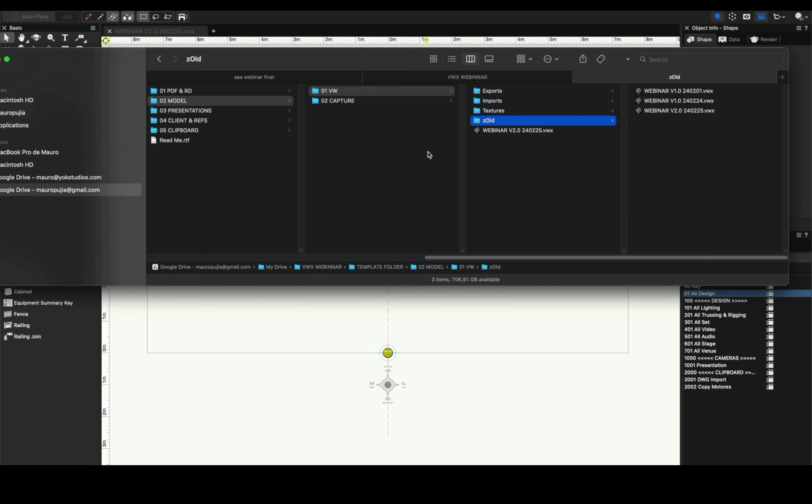I want to start showing you really quick how I organize this on my project folder. I also have a dummy version that I duplicate every time I start a project. It has different folders that I'm not going to be focusing on, but I'm going to show you super quick how I use the folder model. So I divide it into my previs and my model software, in this case Vectorworks, and I put this title, which is webinar version 2.0 and the date of today. This allows you to have a really good tracking of all the versions, and I like to make a folder dedicated to saving all the previous versions. So as you might see here, I have the version 1.0 and I also have the version 1.0 but with another date.

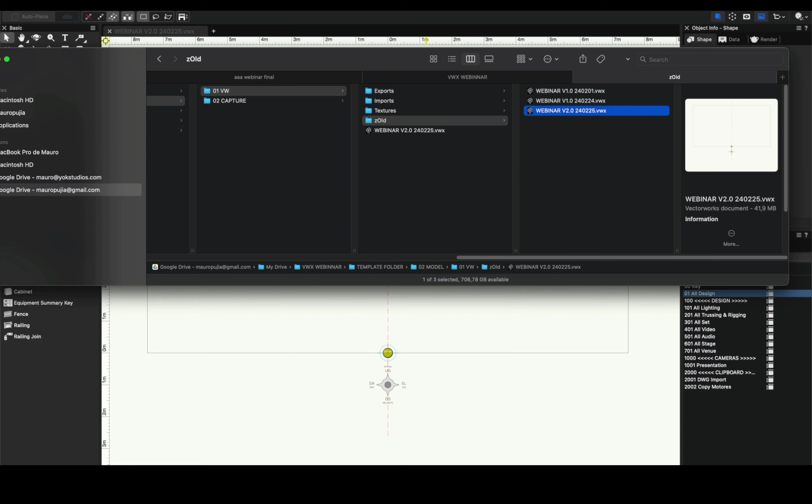So this allows me this workflow of dates, having the date expressed by year, month, and day, which allows you to have a good list of all the files in order, ready to use and check.

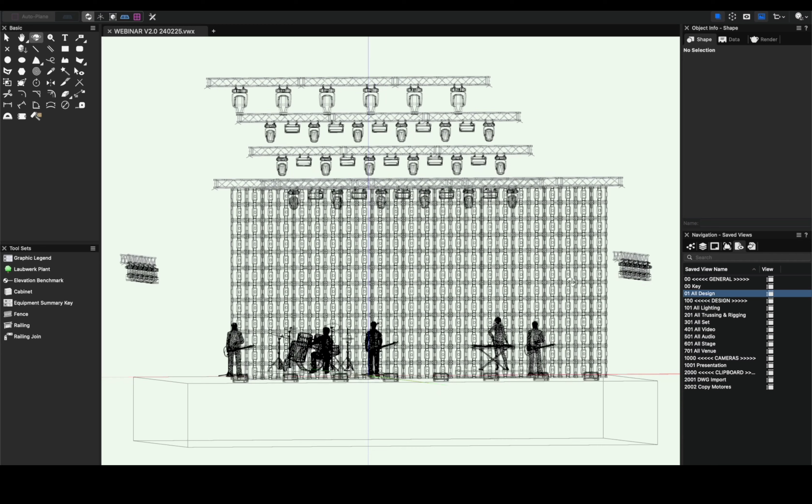So let's get back to the actual template. This is the first look that you see every time you open a template file. As I mentioned before, I have already my views, and I'm gonna jump into an all design view, so I'm gonna be seeing this stage that I already designed. I'm gonna make a shaded view of it and orbit around a little bit.

It's trying to draw all the geometry. Let's wait some seconds, and then you are... great.

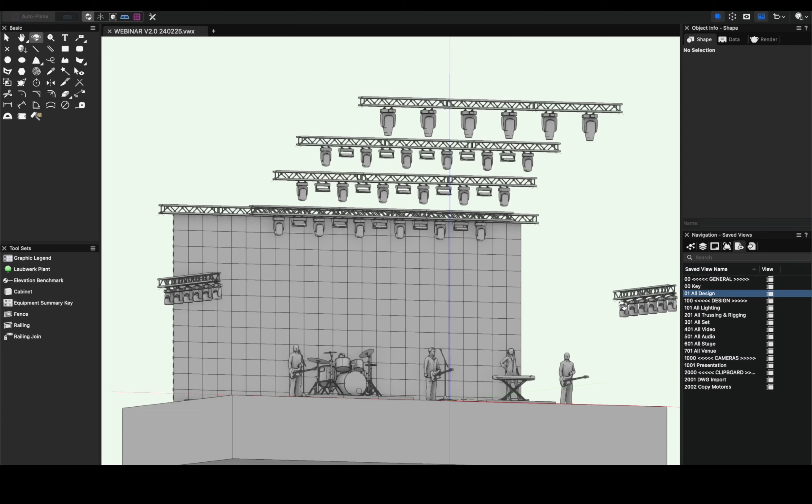So it's really simple. It has one front truss, LX1, LX2, LX3, and two side slides, and at the end, LED screen with some lighting on the floor.

Let's jump back to top plan view. So here I have all of my lighting rig, and as you can see, I already put all of them into my lighting classes. Let's collapse all of this.

So here I have the lighting position front, and the type of fixture is a spot. I always like to mention the type of fixture instead of the model and the brand, because I feel if you replace this fixture by another fixture, it's super easy to find it by type of fixture.

I also have, if I click my magic tool, which I love, the select similar tool, and press the setting class, you can see how these beams belong to LX1, same way the strobes, same way with these beams on the LX2, and so on.

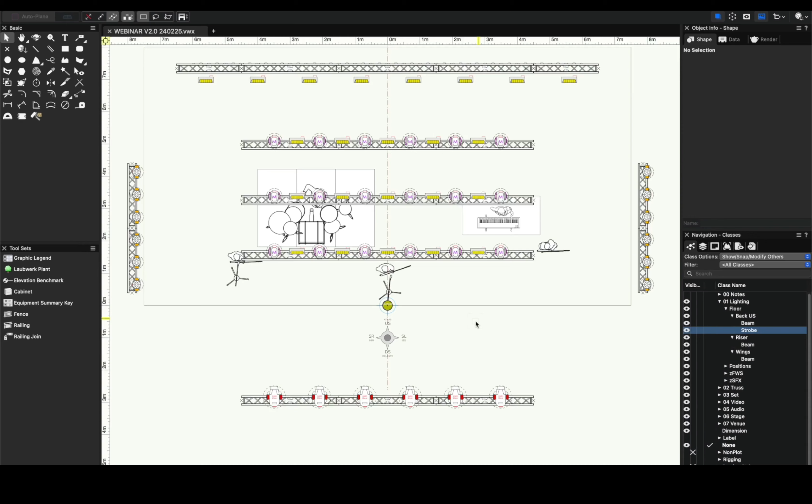So let's say I want to add some beams in the floor. I can access my resource manager, and let's stop a little bit here in the resource manager.

I want to show you how I organize this. It's basically copying the same philosophy of including numbers and departments. I try to condense in the number 3 the set, the stage, and the video.

So here, for example, I have the musicians, which also live in the stage design layer, and the video where I have my LED screen module.

Same way with fixtures, where I have all of my custom fixtures that I made, and I save them in a specific file called fixtures, my name and the year. I do the same thing with trussing.

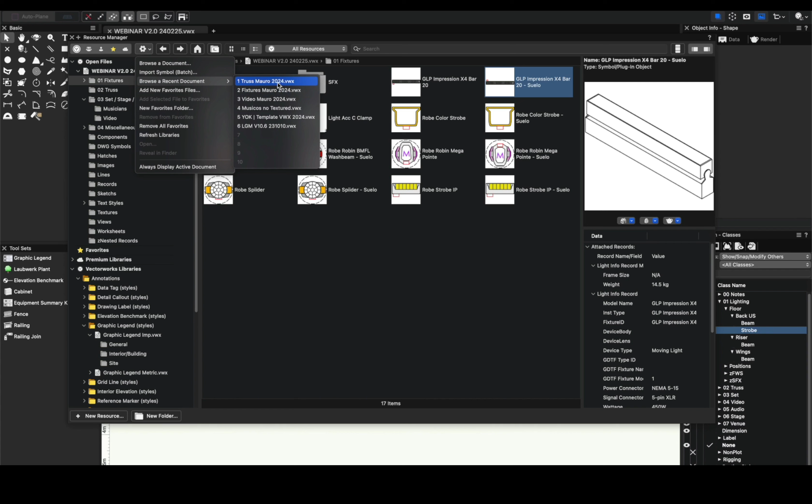And then I like to create different folders for the rest of the components that Vectorworks have. We're gonna see in part number 3 the use of worksheets, and something that is really useful, the graphic legends.

So let's get back to our design. We were dealing with the idea of adding some more lighting to our floor pack. So let's begin doing that.

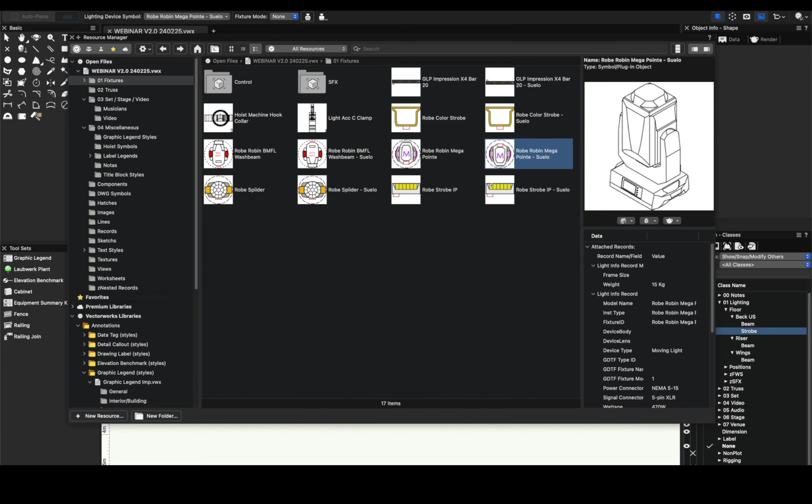I'm gonna select this Robin Mega Pointe. Click once, click here at the center, and then I will use another one here.

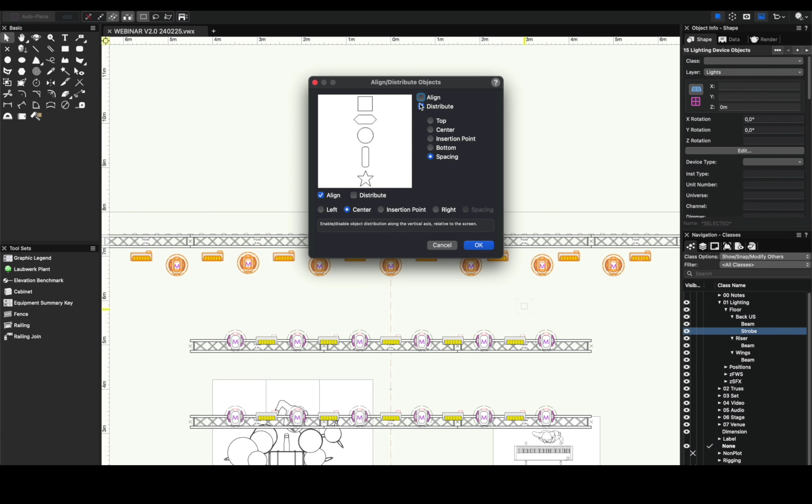This really good tool, I will press with the shortcut, is the align distribute objects. I'm gonna distribute it so I have it well organized.

And I need to put all of these guys into their class. So in this case, it's floor, lighting, floor, back, upstage, beam.

Let's say you also would like to add some spots to your floor pack. Let's turn that this. Another one and another one. Let's align this first.

Excellent, and then let's mirror this so we can have it on both sides. Since I don't have it in my actual floor class, I don't have anything to put these lightings as a category.

So instead of creating from zero, I will duplicate this and edit it. This will allow me that every time I call a saved view that already exists, which holds all the floor pack of this design, we are gonna see these new spots that I already added.

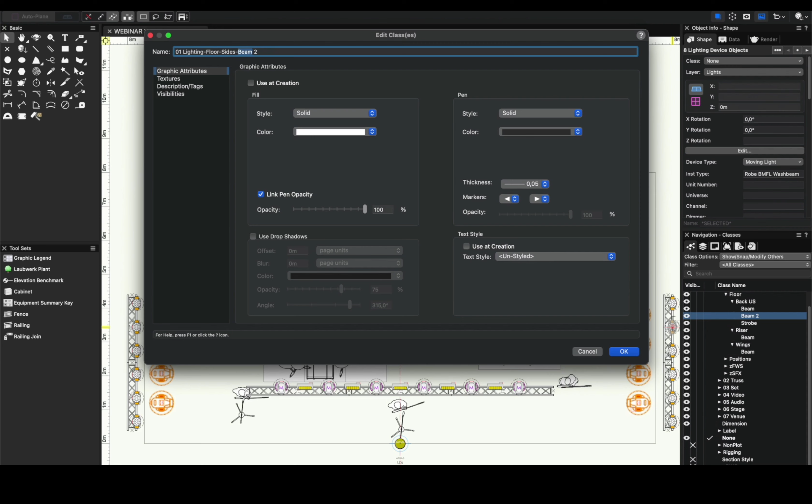So let's put floor, sides, spots. And with the spots selected, I'll click assign to selection.

So if I go to my organization window, to my saved views, I have all the main views for my different departments, and I delete the ones I always use to create some of them, so you can see the exercise from zero. So I'm gonna duplicate all lighting, edit it, change the number, and put lighting floor.

So I'll have all the classes that only belong to Floor. So let's hide every position.

I don't want to see the follow spots or the special effects, and I also will edit the layers because I don't want to see the trusses.

And maybe the stage, I want to see it full. And maybe we can do one for...

Let's do one for trussing, so we can arrange and have different views for trussing, video, and edit trussing lights. So again, same exercise. Oh, that's not correct.

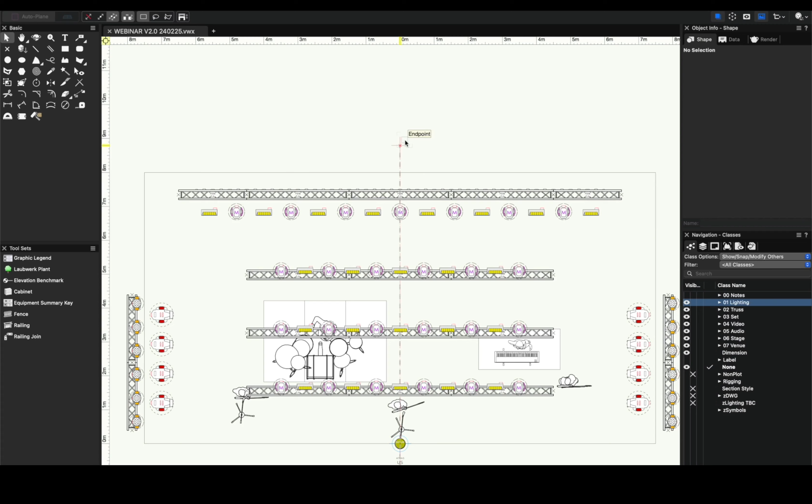So now, if I move here and go to my views, I can click on the trussing that belongs to video and only see the truss of the video. The same exercise for the lighting floors, and so on.

So now let's get back to our design, and we're gonna see how to use duplication on the sheets. So on the sheet layers, I always have a clipboard too that holds many different tools that I use. All of them you can find on the resource manager.

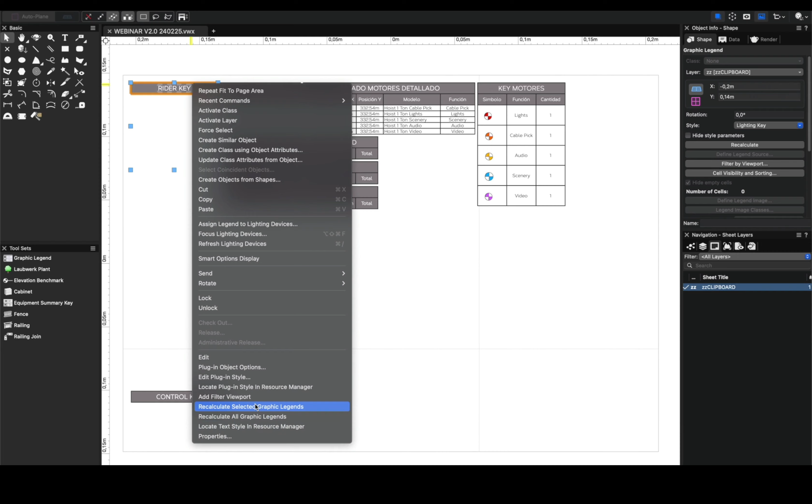This lighting key, I did it from a symbol-based legend, and I edit this through this menu. I click here on defining the legend source and find objects that meet the following criteria: type must be lighting device. I press OK, I press OK, and I press OK. And now I am sure that this lighting key will show me only the information regarding lighting. This is a really useful tool that came up a few versions ago.

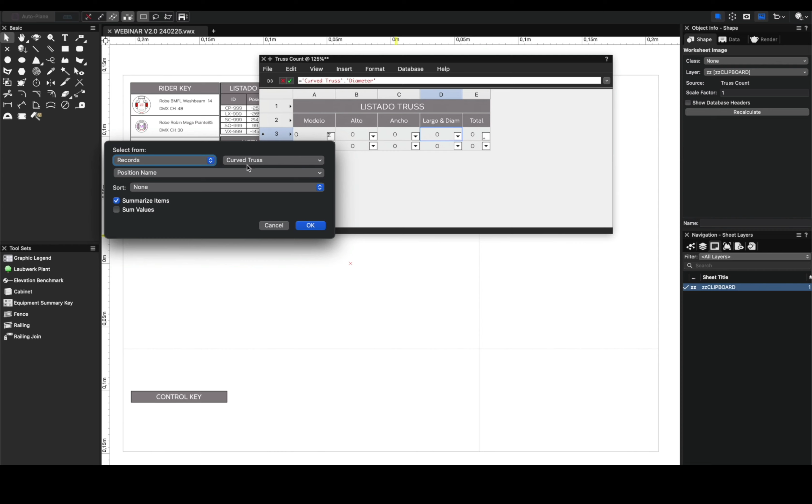And I have the same thing with, let's say, trusses and worksheets. For example, if you locate this worksheet, you can have a truss count. So you have to edit it from the sheet. I have one that belongs to curved truss and one that belongs to truss record, because sometimes I use the tool of creating curved truss and don't assign a record. That's why. And here you can play with the edit criteria to have a better understanding of how worksheets work.

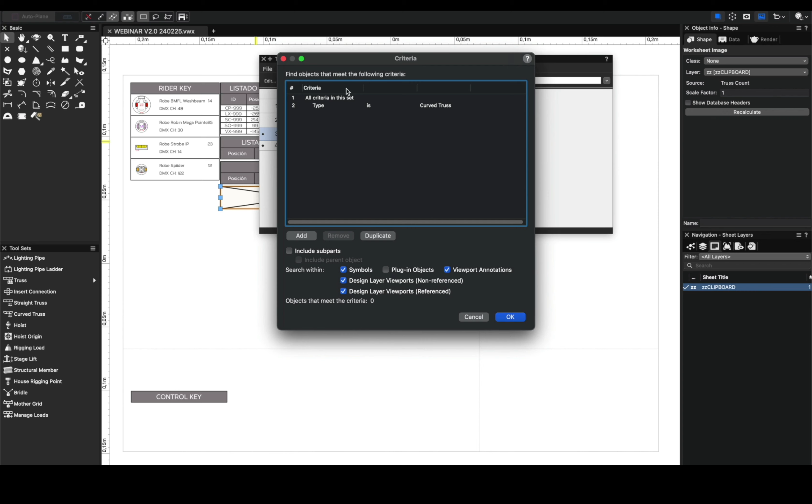Let's wait for that. Actually, I think it didn't come. Yeah, that's it. So in this case, find objects that meet the following criteria: type is curved truss. And here we have the same exercise, find objects that meet the following criteria: type is truss. And we actually have some of them, so it's already updated.

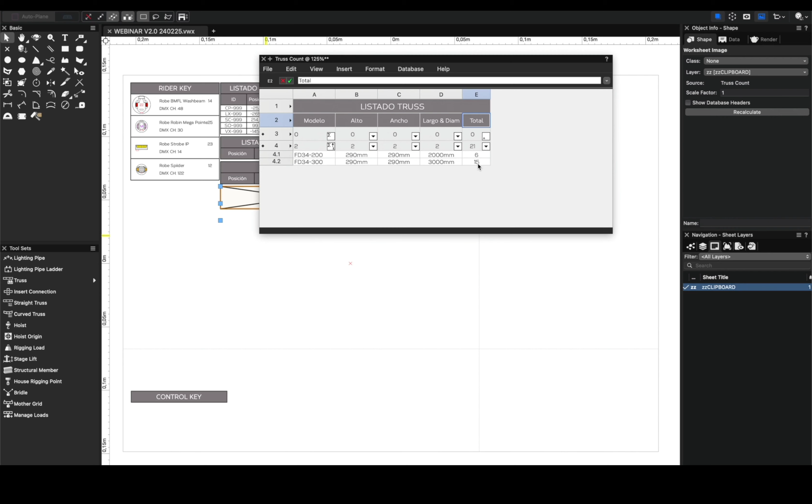In each column, you can edit and have, in this case, the model name, the different dimensions, and the total count. All of that is, of course, something you can edit, and it will update regarding the records.

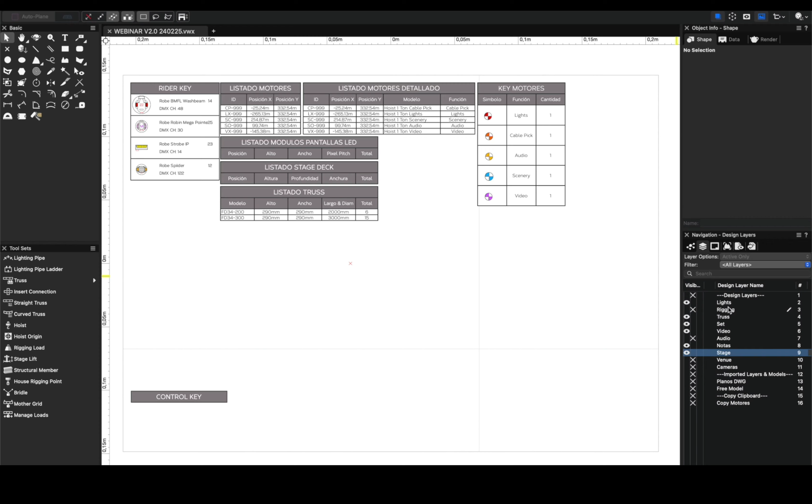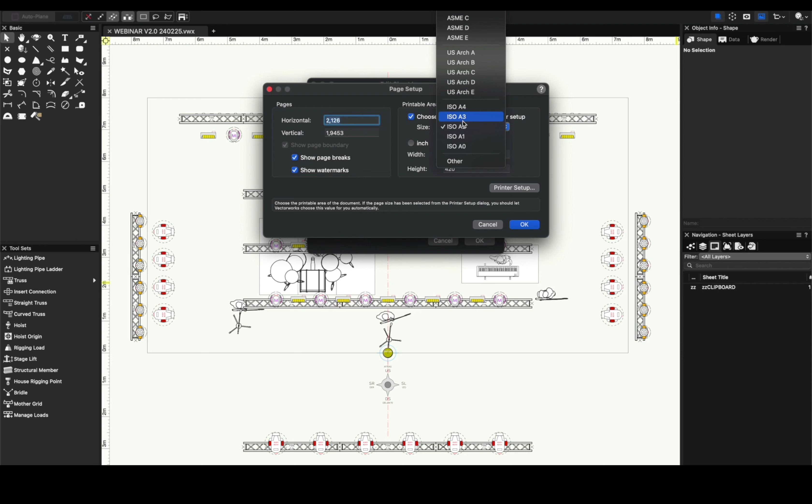So let's create our first group of viewports. I like to start by creating always a page that is called presentation. I'll put the DPI on 300 because it will include some renders. And A3 is a standard here in Argentina. So let's just start.

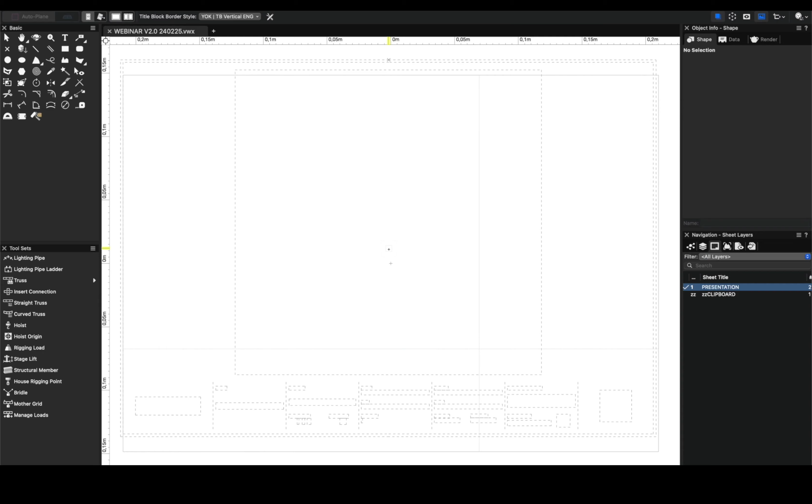Before creating our viewports, let's start composing this sheet. I'm gonna grab a title block. I will use the one in English and the vertical version. This is something really useful that I want to show you.

On every layout, I want to put this symbol that it's also standing here. In this case, it's in Spanish, and it says preliminary plots. So every tech company, rental shop that receives these plots knows that they're not the final version. So I will put the symbol here. And as you can see, I cannot select it because it's on a class that is called stamp.

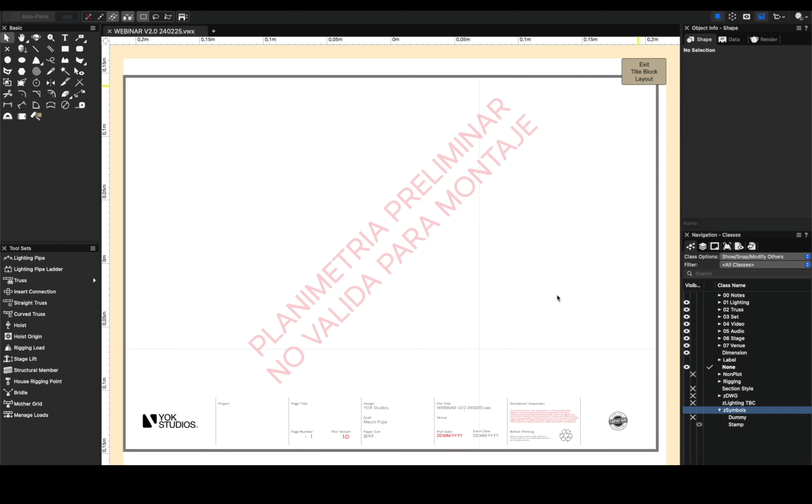So I will exit here. I will come to clipboard and I will copy paste the rider key. Actually, if I press Command Option V, it will be a paste in place. And let's do the same with the truss.

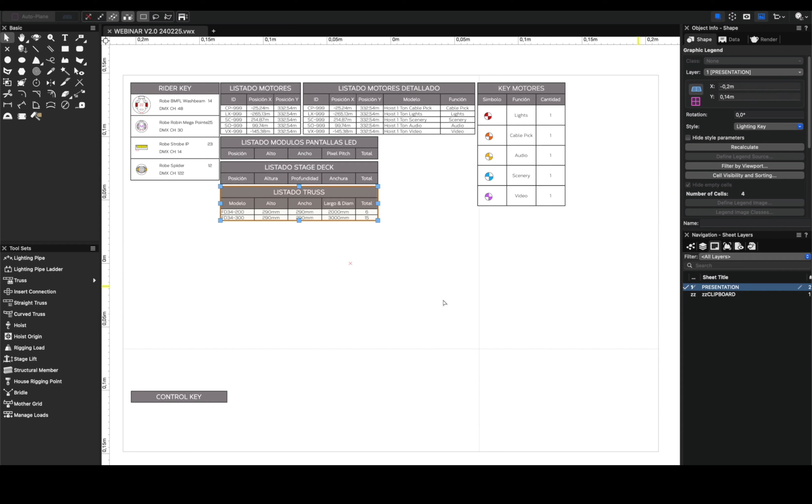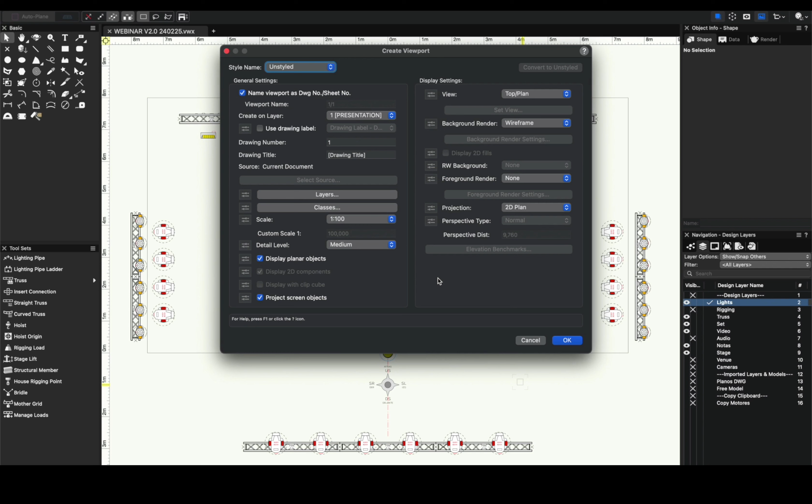Okay, let's jump back to all design. And here we're gonna press F, create viewport, and create our first viewport. I'm gonna scale it on 100. I like to have a top plan view of everything that contains my design. I'm gonna press OK.

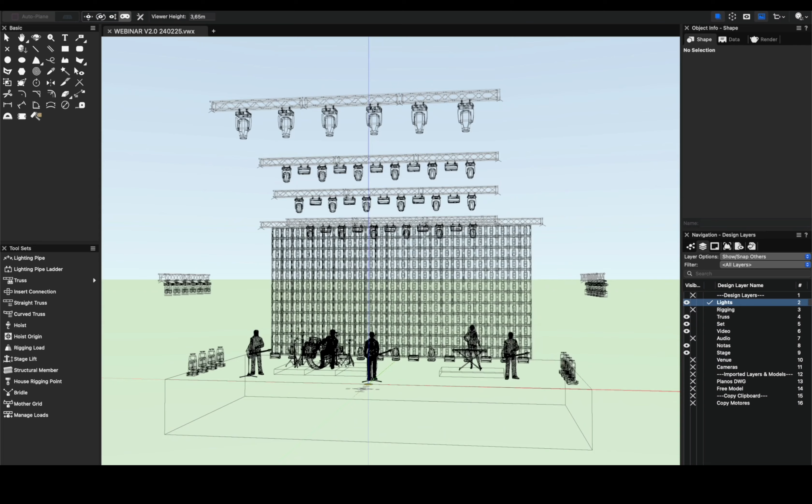I'm gonna grab it over here. And I'm gonna go back again to my all design view. Press number 2 on my numpad. Press Shift U to have some perspective and play with the joystick. And I'm gonna shadow this scene.

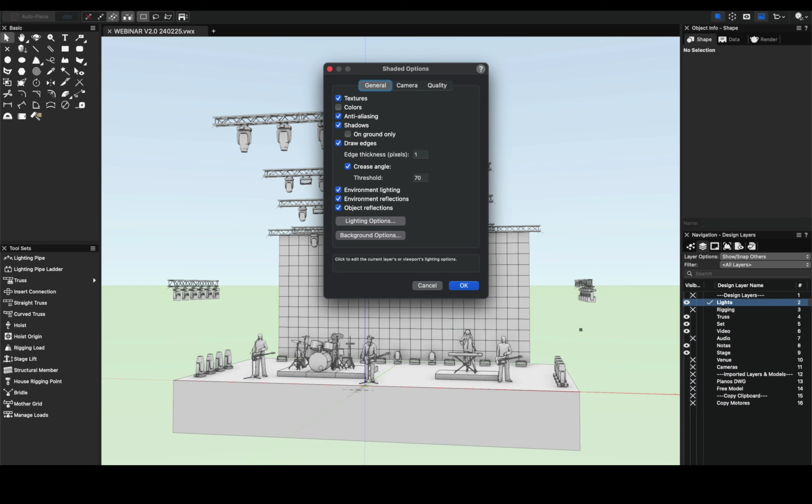I'm gonna create a viewport again. Something that I want to show is I'm a huge fan of using shaded with texture but without color, and increasing the lighting sometimes is useful too. We can go like 90. That's correct.

So I will create my viewport and we will do it this size. Maybe we do it bigger once we are there. I think this is a good size and will arrange good with the sheet.

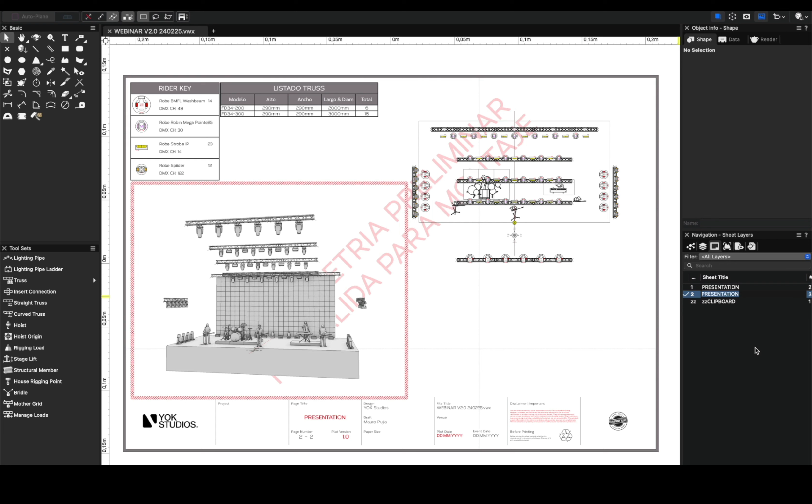So now that we have presentation, we're gonna see how we can take advantage of duplicating sheets. So let's say I'm gonna duplicate presentation, and I'm gonna name this lighting overhead. So I'm gonna delete the render, I'm gonna delete the trussing, I'm gonna make this bigger.

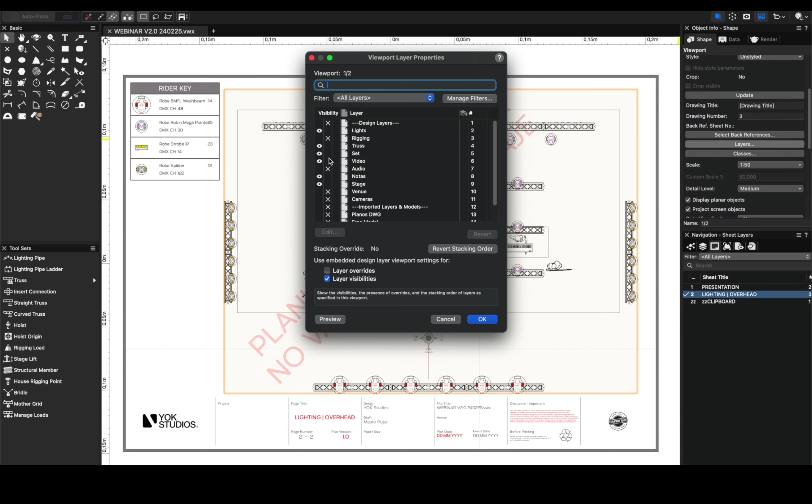Perfect, so we have, oh, it looks like this. Let's double check the floor. Perfect, floor is out, so we have all of our overhead. And this is the advantage of duplicating sheets.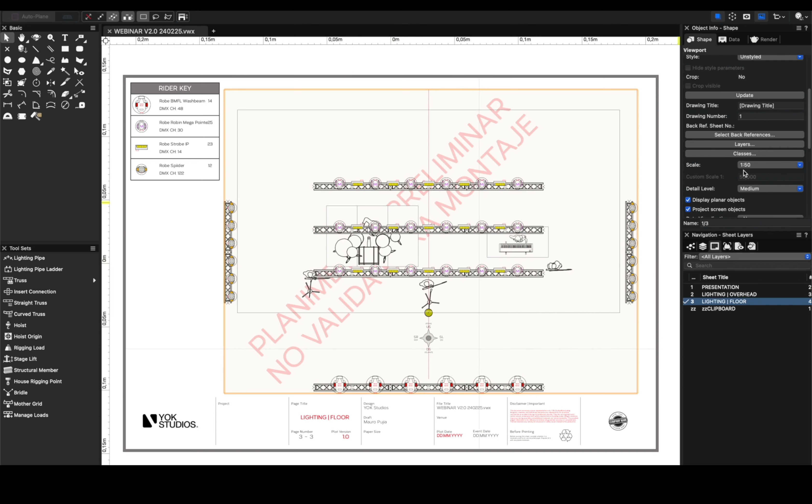Now I can do super quick my lighting floor, and I know everything is well organized. So I will just type floor, same viewport, same orientation, nothing changed. I just go here, hide the trusses, press OK, come to the class, and let's see all the floor, and let's hide everything that is not on the floor, so you guys are out too.

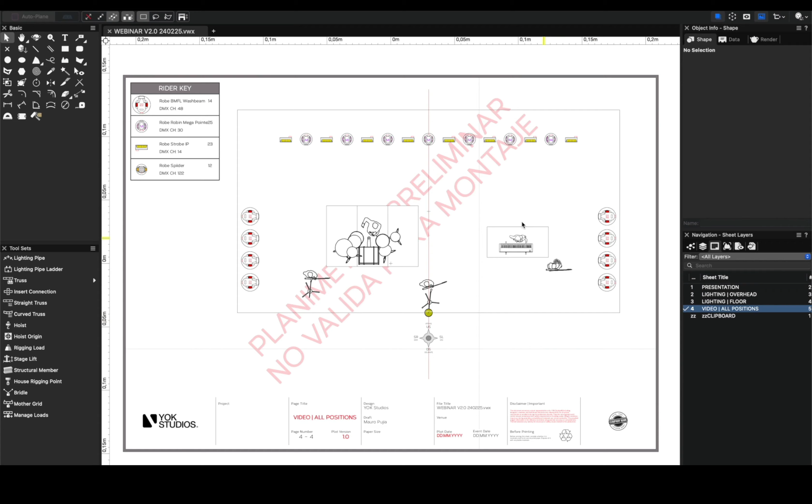And now we have the floor, and we can repeat the same workflow over and over. We can have, let's say, video here, all positions, and again I will click here, hide the lights, show the truss, show the video. Remember to show your classes properly.

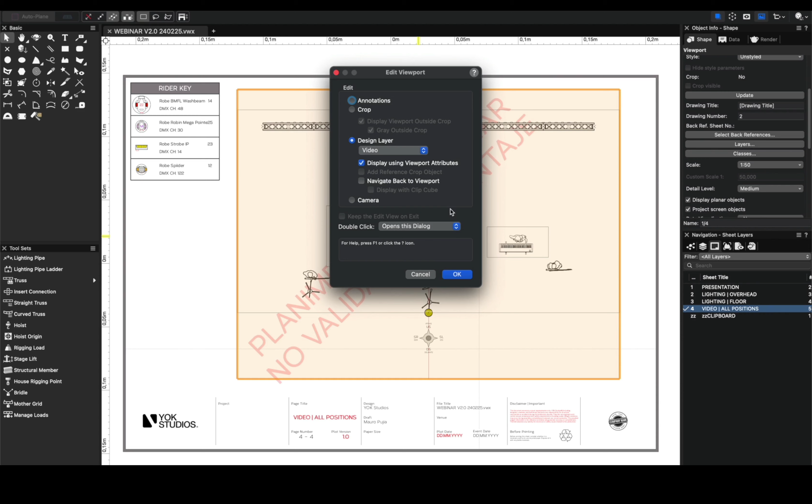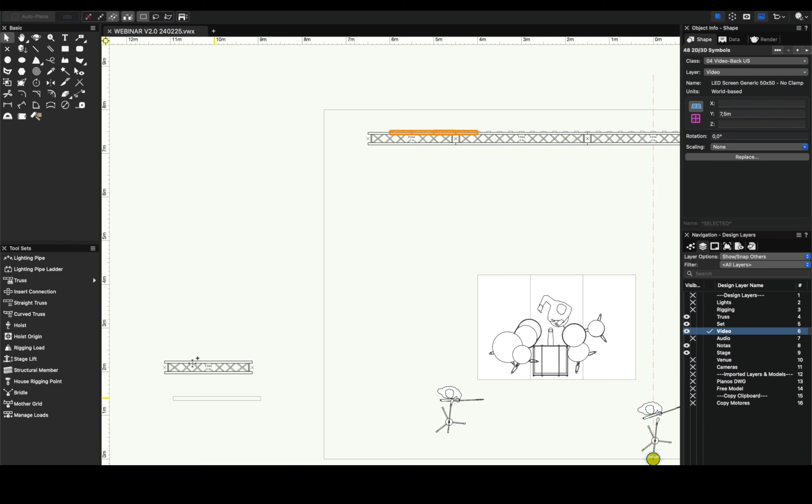So I will do that with the truss. I will put this truss to be a truss that belongs to the image. Perfect. And I want to go to video, and I want to duplicate, say, this amount of screen, and I want them in the center of the truss, of course. So I can have a quick look here.

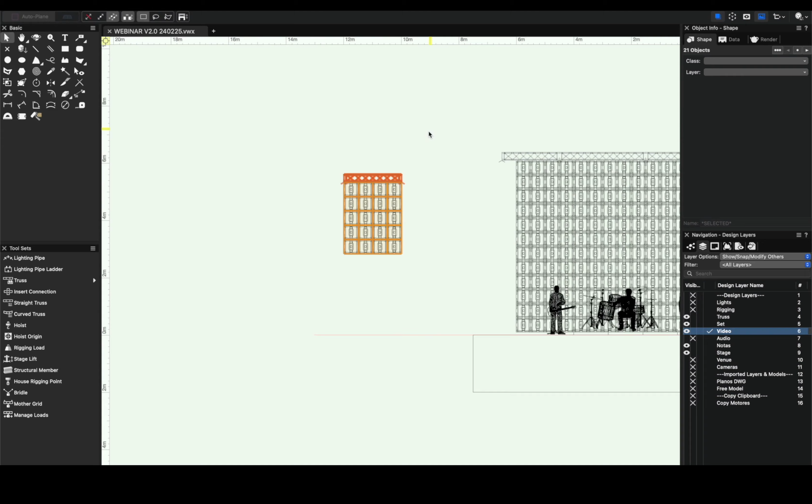We can crop to have a smaller image. We can come here, show snap modify others. I use this option a lot. And we can open it a little bit. We can go top down view.

Mirror it. And now if we go back to video, we will have the viewport updated. In this case, we need to do it smaller because it won't fit. That's correct. And I also sometimes duplicate viewports.

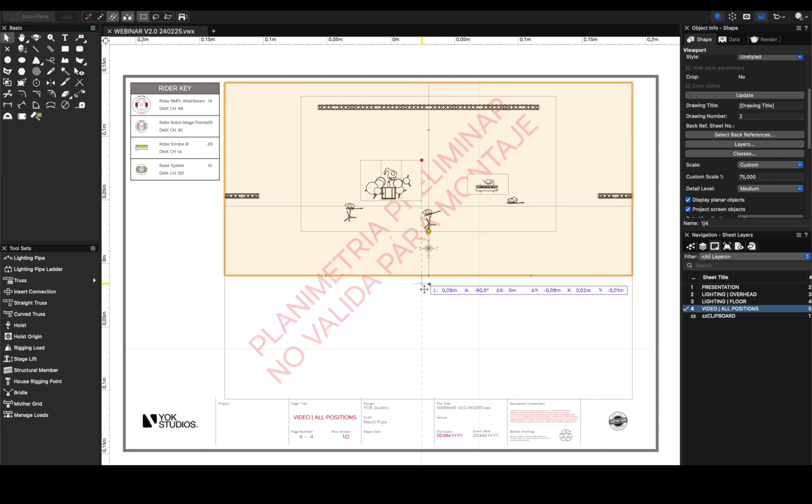In this case, I want to show dimensions on a front side. I just duplicate the viewport and press number pad 2. You can also find it in the object info palette on the view.

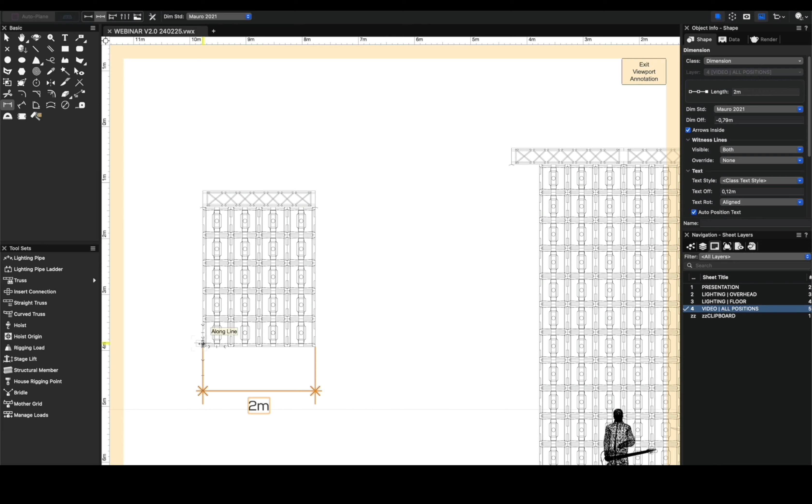So let's give some dimensions here, annotations. Dimension here, one dimension. Oh, it's not correct. Let's make a zoom. Perfect. One dimension here. And let's do the big one. Excellent.

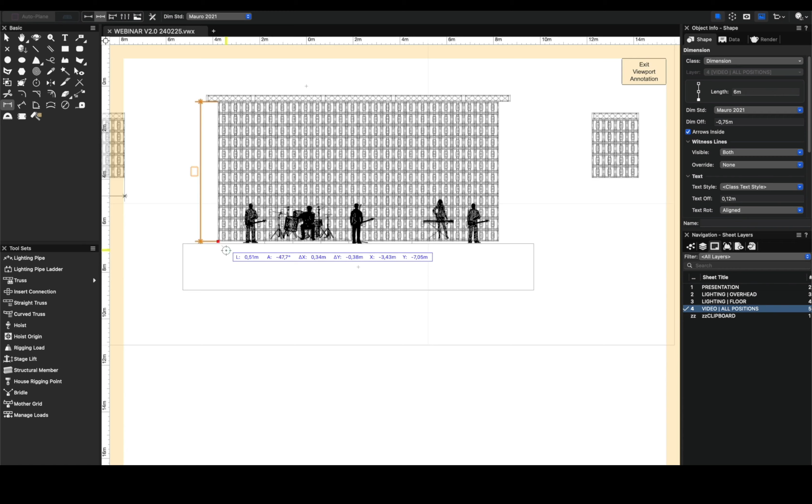Let's place it a little bit smaller. 100 will be okay. That's correct.

And now let's say I want to delete this because this has nothing to do with video, and I want to use my worksheet that has all of my LED screens, positions, and amount of modules. So in this case, if I go recalculate, it's going to show me only the position of Back US.

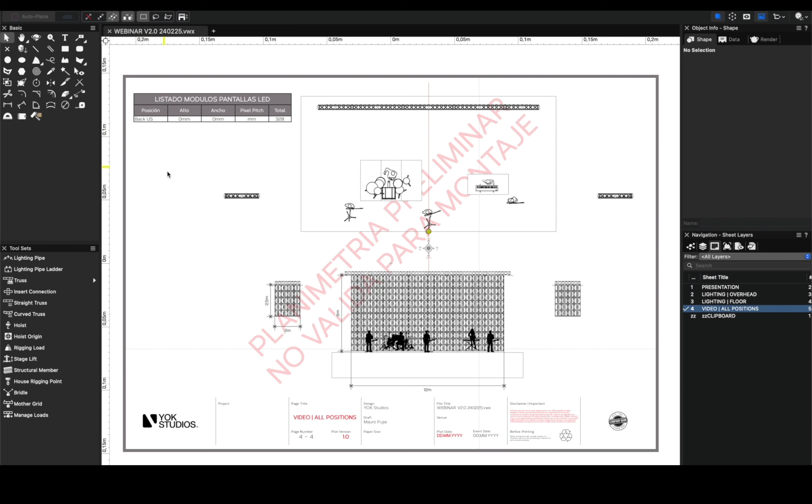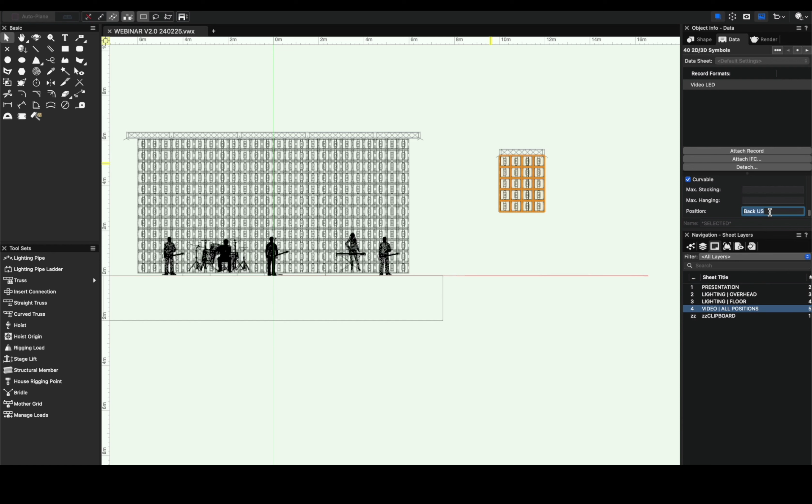This is why I always want to be double checking that everything has its own position through the record format. In this case, I edit this record format, the famous video LED record format, and I add this position at the end. So here I'll put IMAG, press OK, go back to my worksheet, to my sheet layer, come here, recalculate, and that will update perfectly.

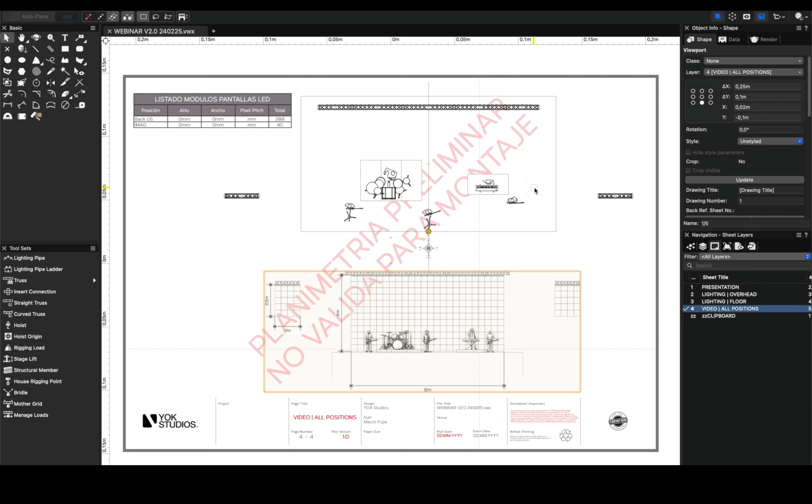So we can make a publish of this. I use the window of publish a lot, and I tend to do two types of publish. The first one, I like to do export PDF separate files so I can send it to the different departments. I'll press OK and publish.

And the second export will be as a one only single file to send to my production manager or any production team that needs to see all of the department information.

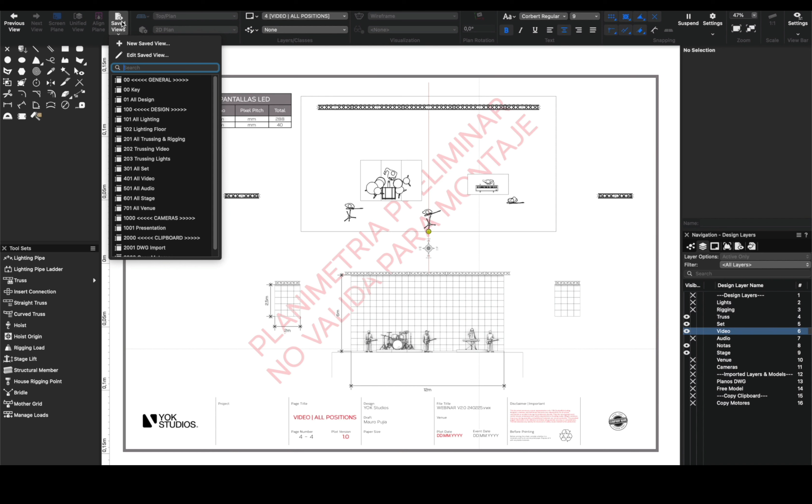And now, to finish this webinar, we're gonna see some tricks for external outputs like 3D files, DWGs, MVR, etc. So the way I like to have all of my exports is through my folder that I showed you at the beginning. So inside, I have a subfolder called export.

And in the case of MVR, since I'm seeing all of my lighting objects, I like to separate the files that I export by the different instrument types. So I'm gonna, through the shortcut, open the Find and Modify. I'm gonna use the light or moving light instrument type, select the Robe BMFL Washbeam, press F, export MVR, and only the selected objects.

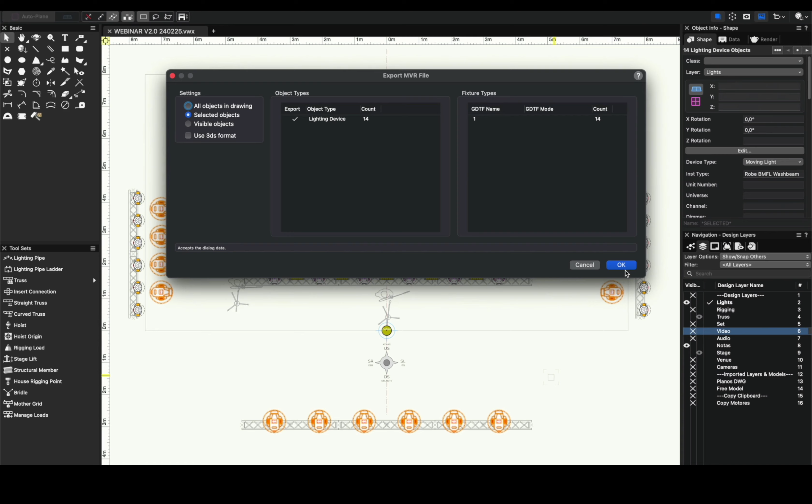So if I press OK, I can go to, where did I put this folder? Come on, I forgot. Ah, now I know, it's here.

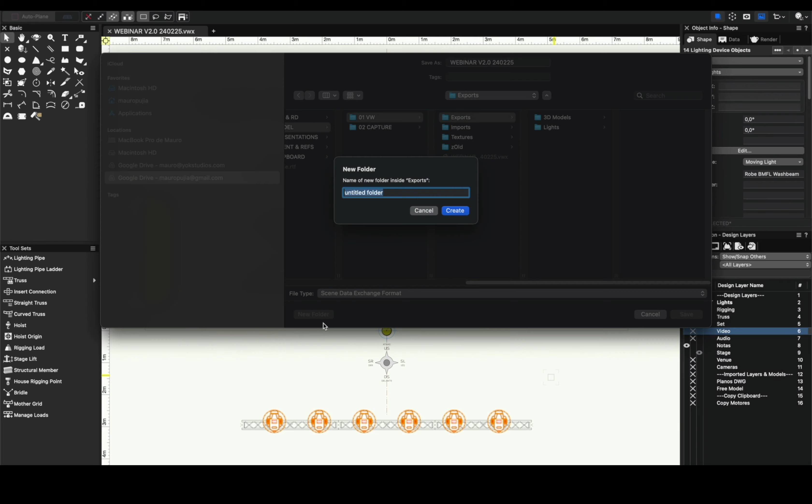In Model, VW exports, I like to put a subfolder for lights and a subfolder for 3D models. I don't use it really often, but let's do it, DWG. Also, something good is to add versions, but since we're working on a single version, it's okay. Sometimes I group all of these folders in a folder that contains the version and the date, so if I have multiple outputs during my design process, I can know where those outputs belong in terms of date and version.

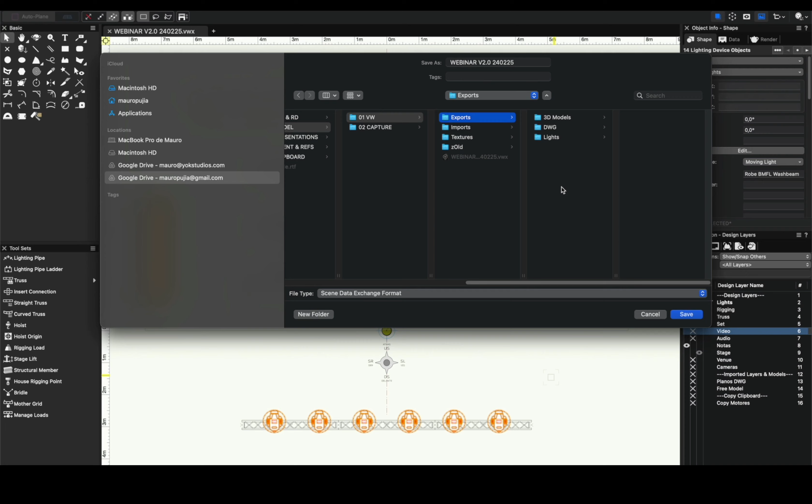So I will save it. I think I saved it on the main folder. Let's check that. Yeah, so let's move here to lights.

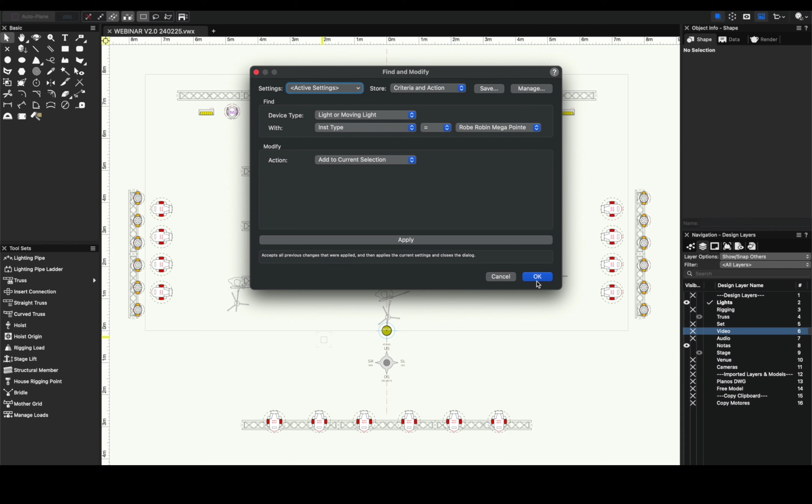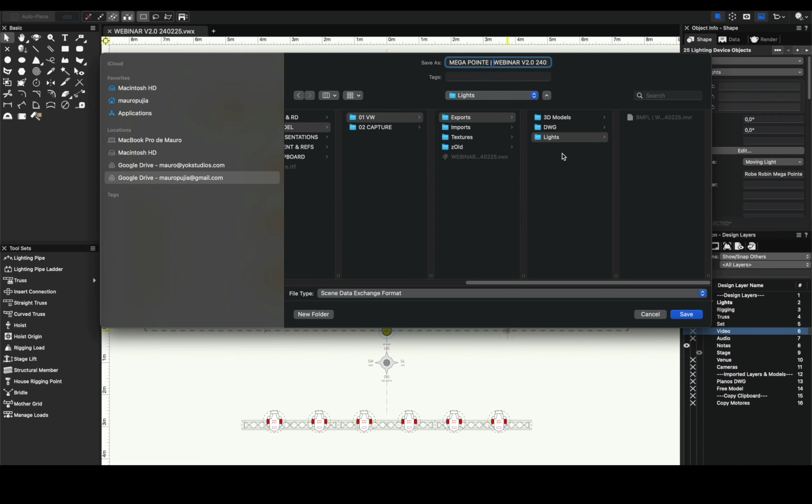And I forgot to put the title BMFL, so I will do the same. Find and modify, I'll do the same with the Mega Pointe, and press export MVR, select the objects. This workflow allows me that if there is any change during my design and I need to re-export again, I can have more control on the things that are in the previz software.

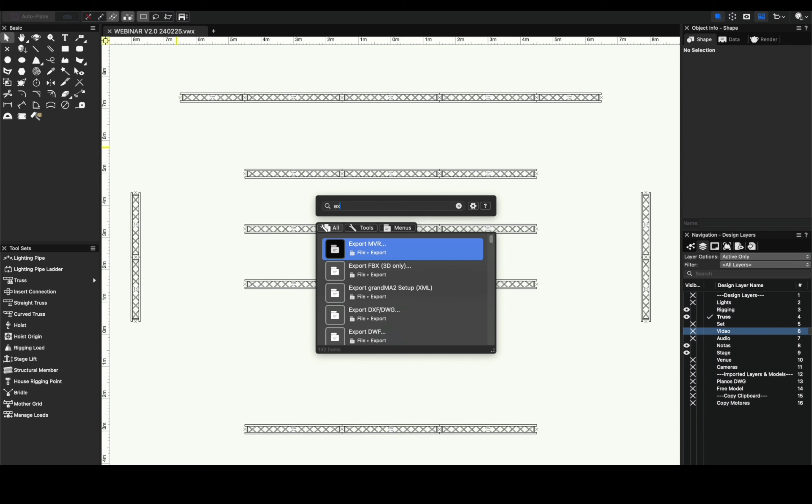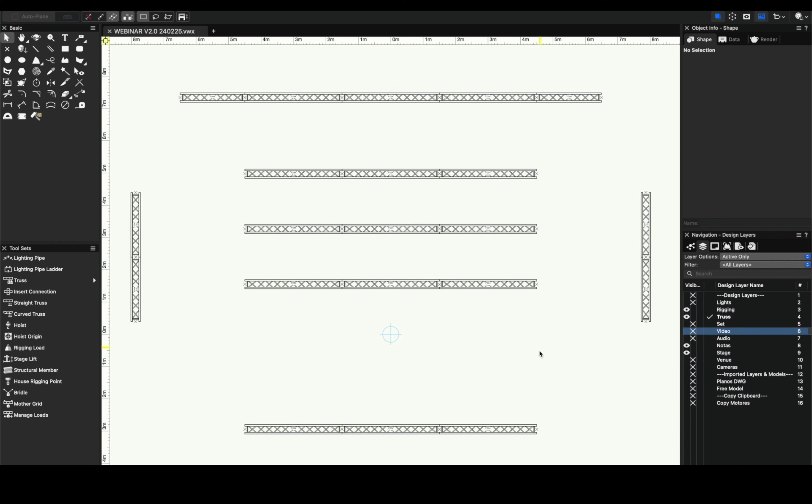Perfect. And also, if someone asks you for a rigging plot, let's make use of the copy motors so we can export the DWG of our rigging plot, which is a common workflow. So what I like to do here is have this copy motors layer where I can grab, for example, my hoist for lighting, go back to rigging - actually, we're gonna use all truss and rigging, we're gonna stand in rigging and copy this.

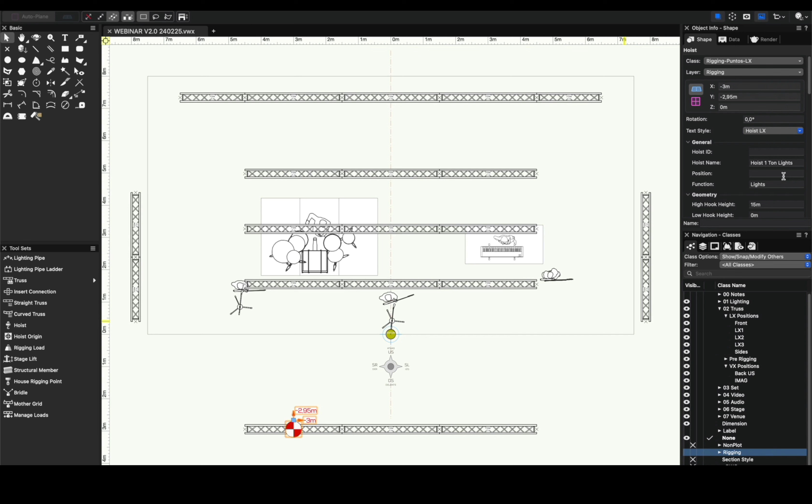And we can start placing them. Actually, before doing that, you want to make sure that you have all of your rigging views available on hoist, and also - where's that? Let's check, not this one. I think it doesn't have a number, right? Yeah, correct, 101. And what I like to do is place this in the center with the first one.

So now that I did that, I can start copying everything and it will have the same coherence. So let's place it super quick and random - doesn't need to be perfect, it's just an exercise.

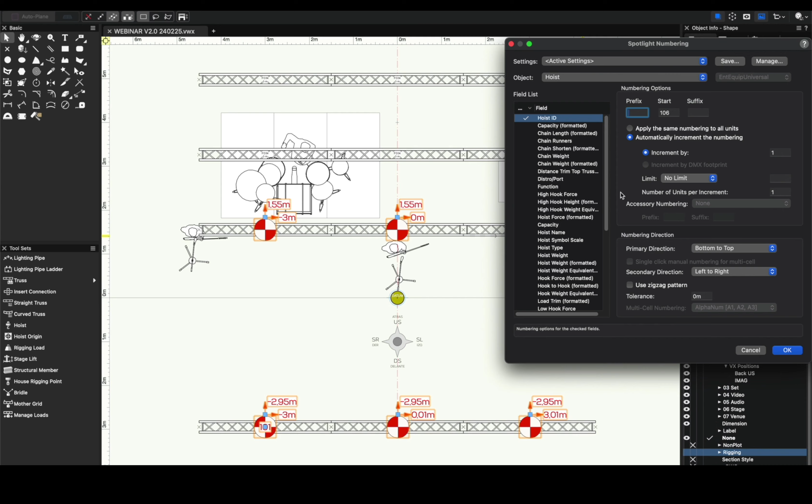If you want to number these, you can go super quick. Let's just begin with these ones. Through the shortcut, I put the spotlight numbering that also works for hoist, and I can put starting 106, increment of 1, left to right. That's correct. And let's do it for this.

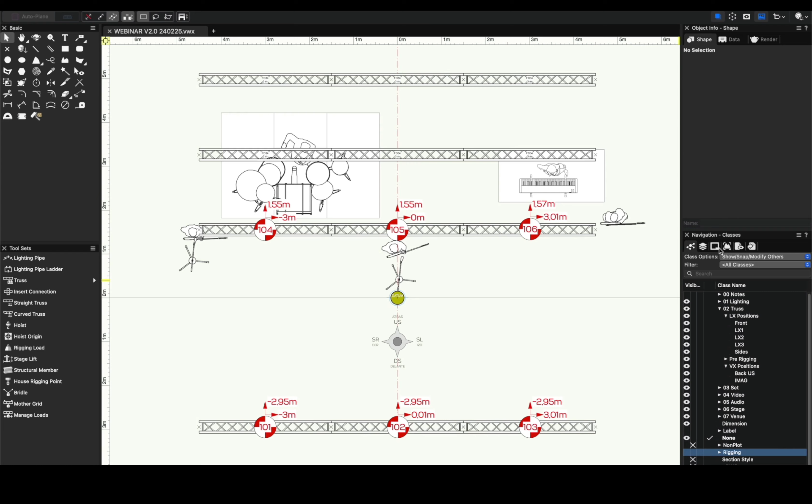And also, since I don't have exclusive view of rigging, I can make use of this tool that will hide different classes and layers, hide everything, put truss on this state of visibility, and I can come here, all trussing and rigging, so I'm gonna be saving 202 rigging.

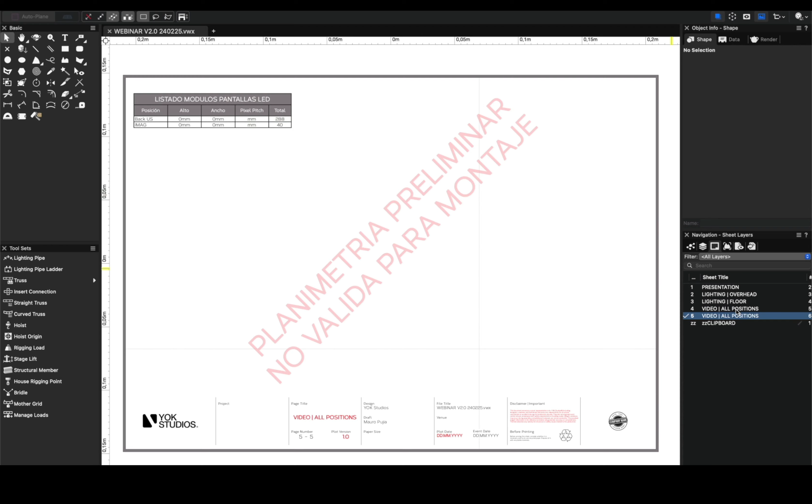And I can come here, duplicate, delete this, delete this, delete this, come to my clipboard, grab the list of motors - why not the key - paste in place, rearrange this, beautiful.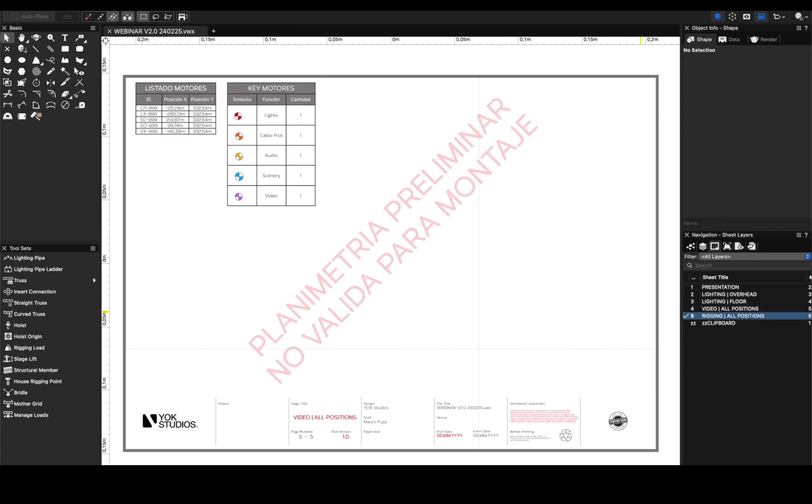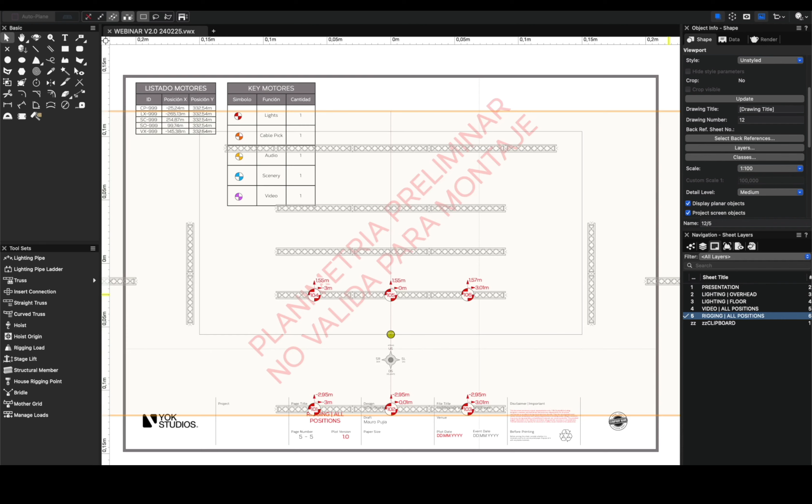Change the title, rigging, all positions. We come here, go to rigging, create viewport, and you can see - okay, let's put another number. I don't use this, but sometimes even if you don't use it, it's still there. Custom, let's place 100. We can place this here and make it a little bit bigger. Let's say 75. Beautiful. Let's update this.

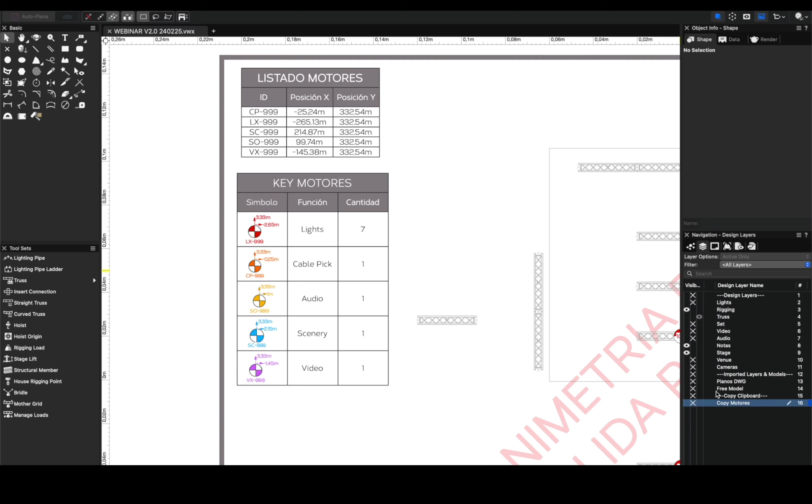You're gonna see different motors on my key because hoist motores is in Spanish - because I haven't deleted the ones on copy motores. So you can come here, delete all of this, get back to your sheet, recalculate that, and you will only have the ones that we drew.

And now let's do the final output. As we promised, a very simple DWG export with this setup because we only want to communicate the rigging. So it's gonna be all visible design layers. I like to export invisible classes in case I miss something - that's my default active settings. All of this I check it. Not this option, because I want a single file.

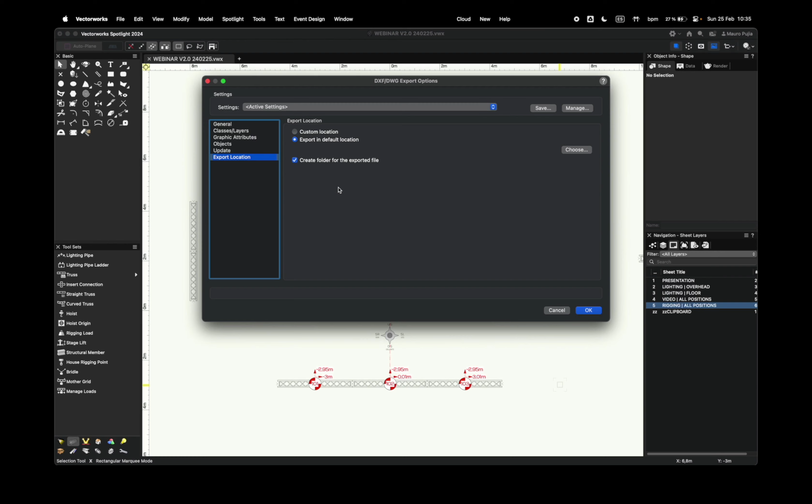Some of my configuration that I always use - update everything in case I'm missing something, and having a custom location, or sometimes I also export in default location. And I choose this from here so I don't have to do it later. Exports DWG - it is already done, I will actually do it again.

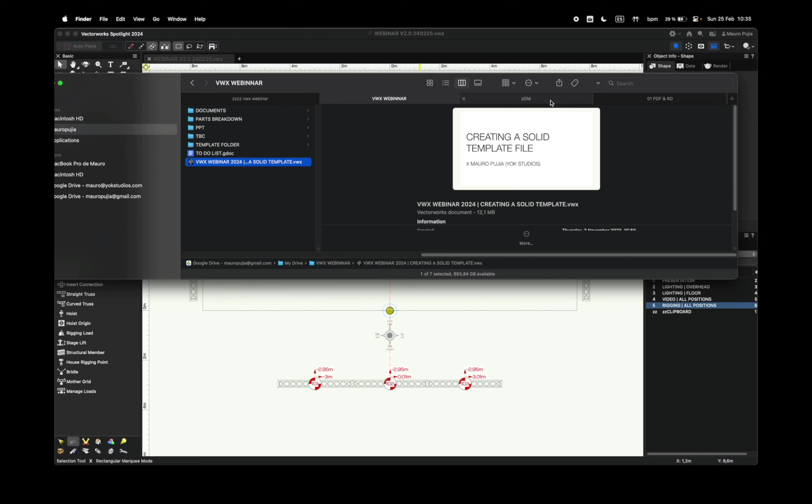And that's it. Now you can find it on your folder in the export DWG.